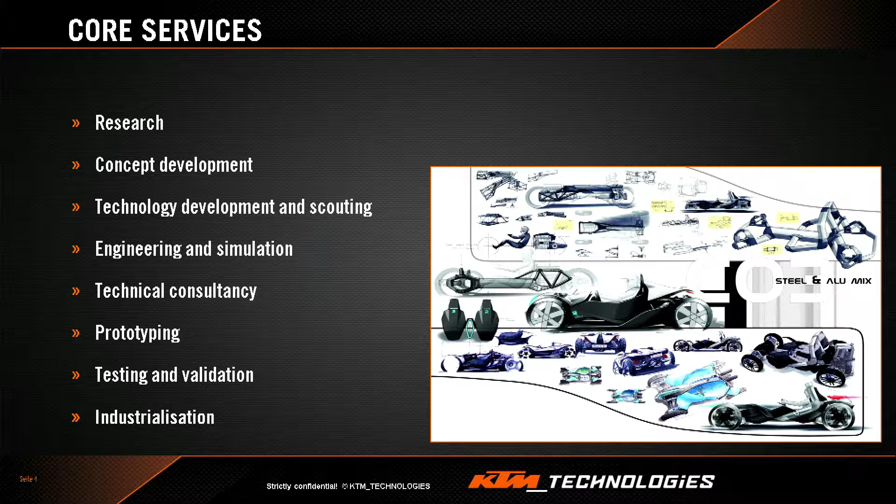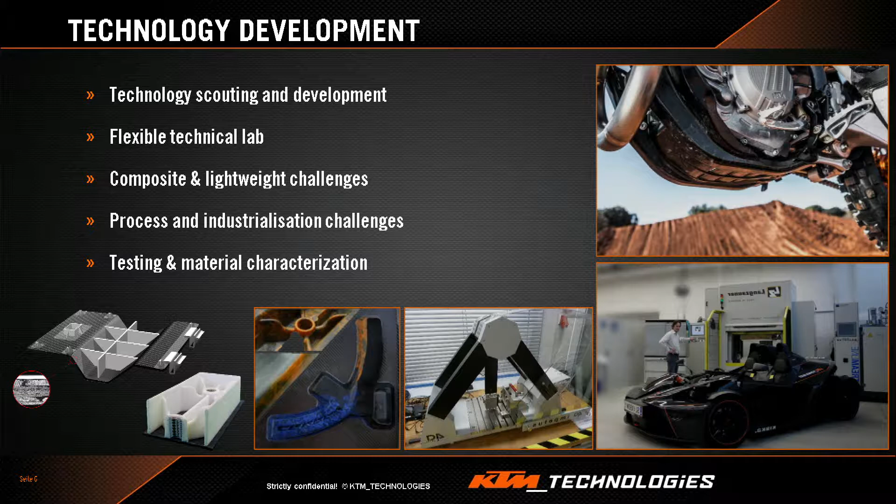We cover the whole process chain, from the early stages of research and concept development to the final industrialization of the parts. At the stage of technology development, which is actually the department I work in, we are pretty focused on facing the challenge of composites and lightweight.

We have a pretty good knowledge in material characterization and testing. Inside this department, my group, the Additive Manufacturing Group, is focused on much more than what's typically taught in this sphere, as a way to emphasize what's different with respect to the competitors.

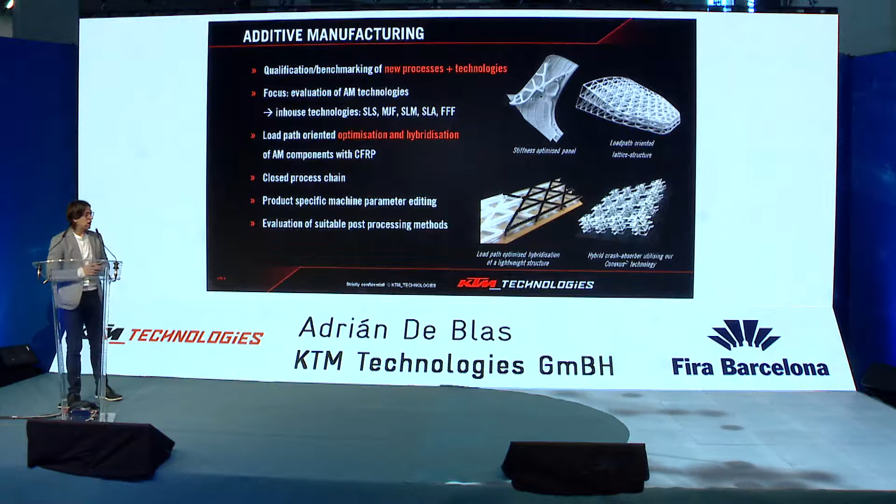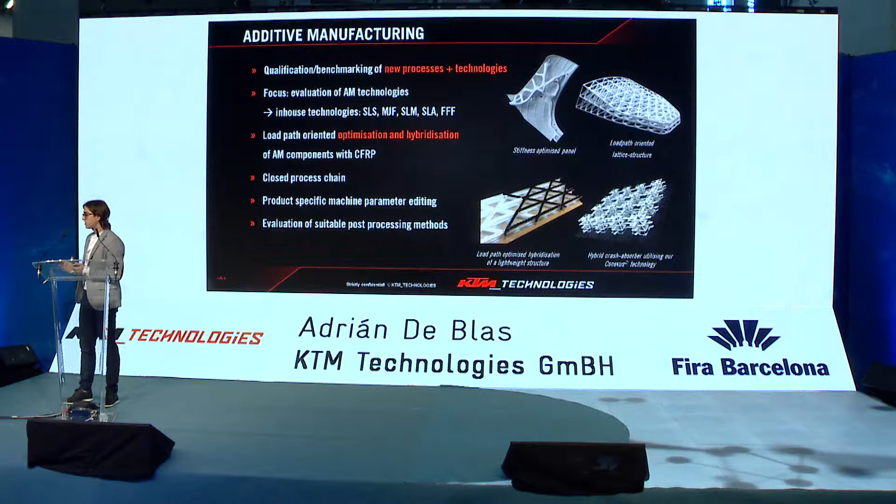We work on looking for optimized solutions for parts based on hybridization - the hybridization of additively manufactured parts together with carbon fiber reinforced plastics, and how to look for an optimized part that could bring us the solution in this case.

Regarding this, in the first stage we take a really good and deep look at new concepts in terms of materials present in the market, new technologies, and new processes.

To give you an overview of our facilities, we can use all the facilities from the KTM group. It's more than 18 different systems, 4 technologies, and in total more than 12 different materials, placed around Austria.

We are placed in Salzburg. This is our city, and we are together with Kiska, a design company that we partner with a lot in terms of design. Also at the headquarters of KTM in Mattighofen, but also the SLM technology that we use in Kapfenberg, and with the Pankl systems.

Coming back to the topic that brings us here today - when I started at the company, I was thinking about how we could introduce the use of AM polymers into industrialization. We did tests to think about what were the first factors we should take into account. For sure, quality assurance was coming, overall safety, economic viability, and process repeatability.

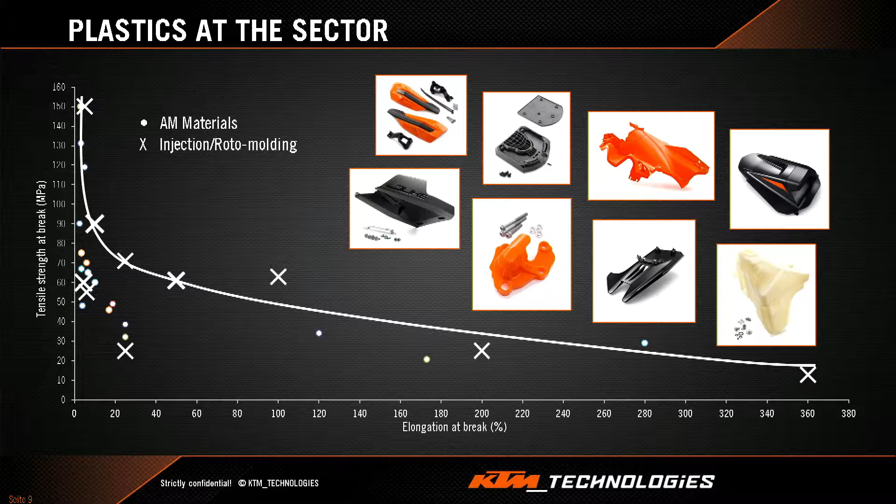We could get the benefits of using additive manufacturing, but why weren't we using it then? Well, take a look at the tendency of these material properties. Those are only two values, but we have to consider many things, like the anisotropy behavior of additive manufacturing, and different aspects like the repeatability of the parts we are getting. But just focusing on these two, we compare with the current situation for commercial available materials, and we realize there's a gap still, and we need to solve this problem.

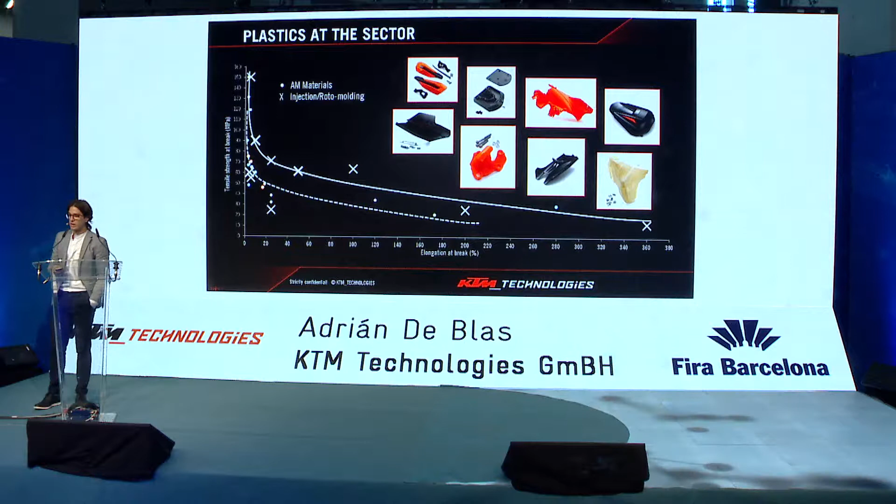So how did we think about solving this problem and bringing a solution? In our company, of course, it's a solution that has to be lightweight, but for a functional part. We thought about the word hybrid, and to achieve this far away aim, we said, okay, we need to start with two strong pillars.

The first pillar is additive manufacturing, bringing us huge advantages like freedom in design. But we have to really ensure the material performance, and that means not only getting material information from suppliers, but also characterizing this material.

The second strong pillar is the use of composites, the carbon fiber reinforced plastics, where my company is a real expert in this field. But we thought, how can we merge them? Do we need a connection? So this is the bridge, this is the hybridization. About this, KTM Technologies has developed a technology with the name of Connexus.

You can know more about this in following congresses, and also how they prepare the introduction of this into industrialization with the project Next. But we don't forget about all the pillars that are important in additive manufacturing, like simulation, the use of design for additive manufacturing, a proper way to design parts for additive manufacturing, and proper production and testing - four common pillars we really still have to think about the first ones.

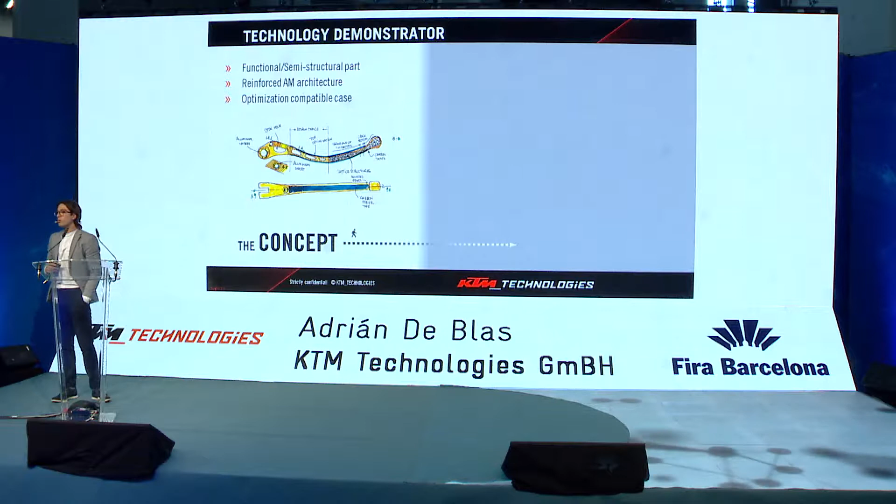And when we were told to come here, we thought, okay, how can we show these people the real benefit and potential of using hybridization? How can we tell them that this is a real way to face the challenge?

And we thought, okay, let's prepare a part that we could show them all, a part in AM polymer that could not fulfill the requirements of a load case. And then let's make a reinforcement of this part by CFRPs. And let's make this also a case where we can optimize it, to show our creativity. And that was the result.

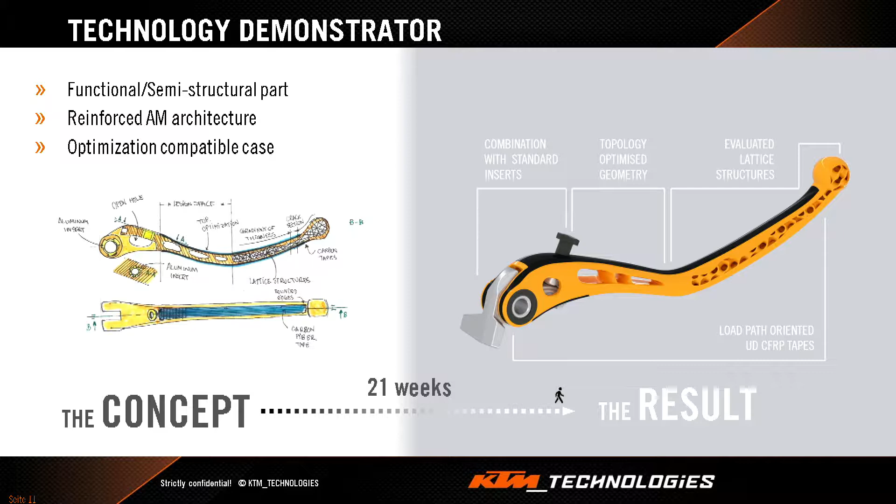After 21 weeks, we achieved this result. It's a part that mimics the same shape of a KTM motorbike brake lever for street bikes, which also includes some features for additive manufacturing, like lattice structures and topology optimization. But the brand new thing here is that we applied an optimized load path-based distribution of unidirectional carbon fiber surrounding a three-dimensional complex surface.

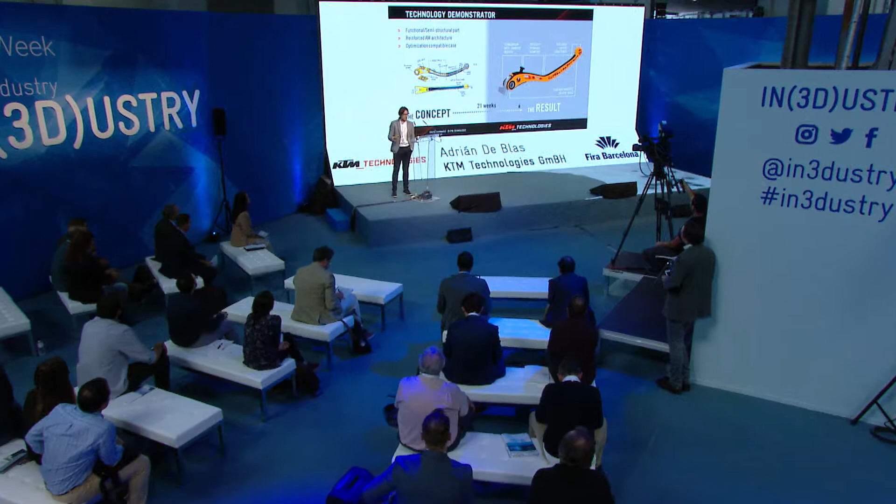So I will give you an overview of how this project was taken on in the company. It's not that easy - it's not just plug and play, using a software and defining a loading case and the constraints to get a proper final design that you can define as a functional part. Because in this case, we also had to take into account the hybridization topics.

We also have to care about aesthetic problems and, of course, the different technologies that we could use to produce it.

So when we started the project with a strong base in phase one, we started researching which existing materials we could use for this. And we defined, okay, let's make a criteria from which we will start, a starting point for the design. In this case, it was to use the ISO 8710 for motorbike brake systems, and we will withstand the load case criteria that this ISO is asking for us.

So then we defined a basic geometry based on a topology optimization for an aluminum part. This reference model was made in aluminum.

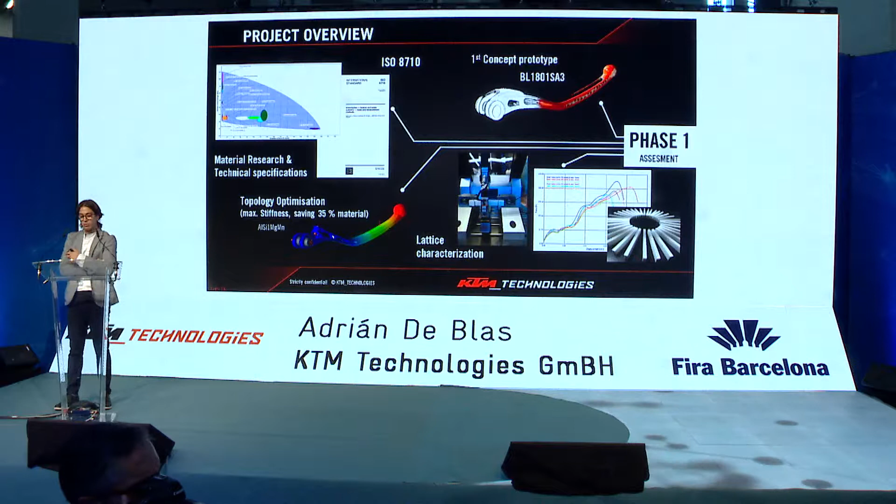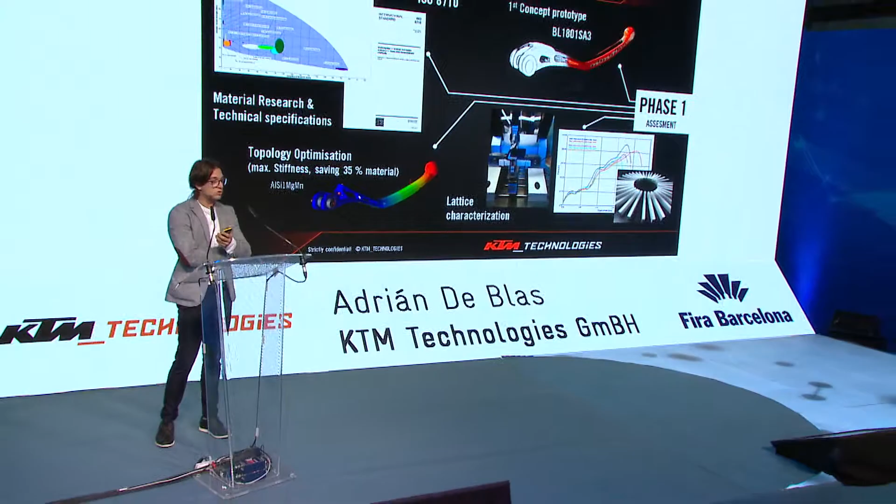And then we decided, OK, let's create a first concept and include lattice structures in this concept. But many of you fighting with this realize that the computation and modeling of lattice structures is not that easy, and it's really time-consuming for a company to achieve a final simulation. So what we did differently is to actually characterize the behavior of lattice structures. We created a library of different unit cells and made a characterization of this.

And then we base our selection of these lattice structures on the behavior, on the results from the testing. After this, we go to the proper design. Although I show phase 2 and phase 3 here, they are overlapping, in continuous iteration. The results from the simulation come to design, and come back to the simulation results to make a proper and optimized simulation.

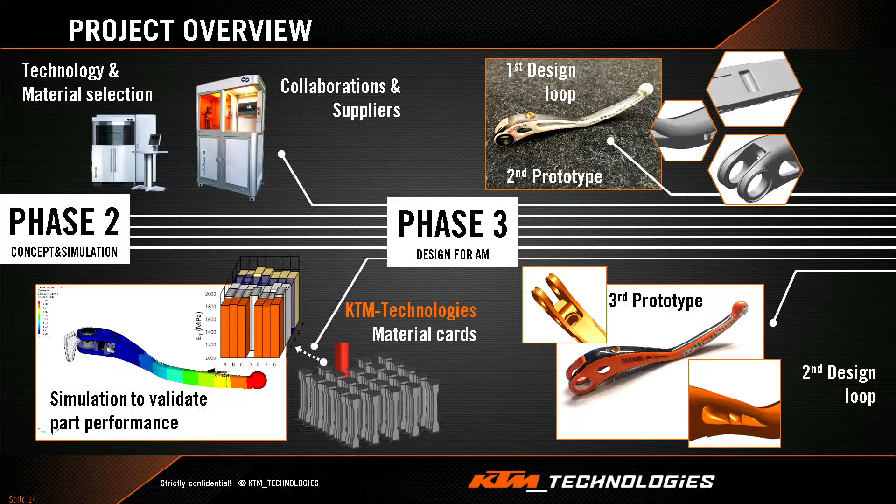In this case, what we emphasize is that we are not using the mechanical properties we receive from the suppliers, because those properties are not really evaluated in all material, all houses, all technology. So what we do is use our test specimens to properly characterize them, obtain the real properties we'll get in these parts, and use this information on the difference we can have in the same printing job. All this information goes into the loop for the simulation.

In the meanwhile, we make the networking to get collaborations, partnering, future suppliers of different technologies that could fit all requirements for this project. And as you can see, we start making the loop and iterations in design.

So at the end of this phase, we add the last design features or aspects in design, and we make a functional assembly check. We can see here in the real motorbike, OK, this part will be working and similar as it should. We already achieved an optimized simulation of a part, how it would work for this case.

After this, having already defined our criteria, we select our final design, and then go through our suppliers or partners to send them the information to finally get a part. In this case, we use 5 different materials and 4 different technologies, because we were looking to ensure which will fit perfectly in terms of the hybridization and combination of the composites together with our core part.

So that's why we went to a benchmarking project as well, to show which material will fit or benefit from this hybridization. We include in our technology, of course, a stage of surface finishing that I will let you know more about, how tough it is to actually get a proper surface finishing for a functional part.

So after this, what we achieve and what we are looking for is not only to demonstrate what we can hybridize and combine, but also we are always looking for parts that we can ride. And when this ended, the first thing we did was testing, because we validate our part. That's what I like to demonstrate, that we are not looking for maybe future groundbreaking solutions that are not yet for the current situation of the market to get into production, but we are looking for parts that we could really use in our market base, in our business case.

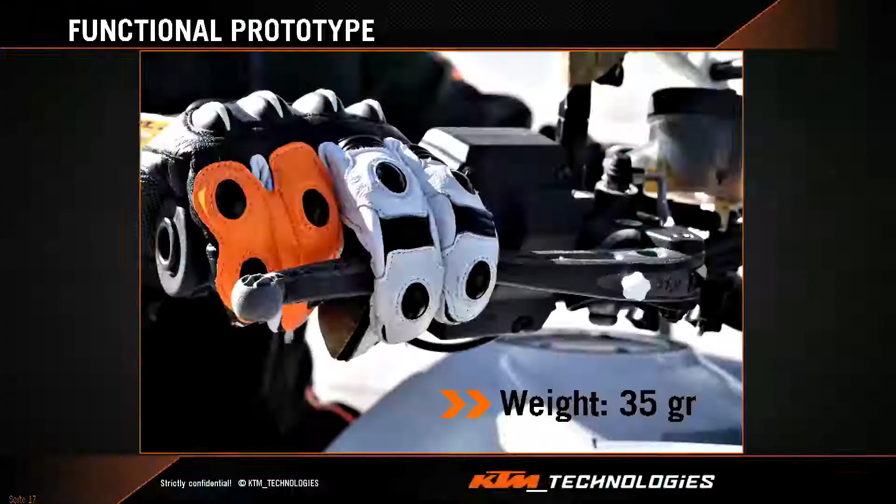So you can see here, more in slow motion, my driving test driver, how I use it. And actually, he reported to us that the feeling was proper, the same feeling as the brake lever he was using in aluminum. It was the same feeling. In this case, the brake lever was only 35 grams in the final part for this material.

As I told you, we did a benchmark, and also in this project we consider different materials, and we define what will fit us for a future project. For this part, which you can also see at our stand later if you want to pass by, we make our final report of the results that we can provide to our decision makers in the group, and we show them these interesting results.

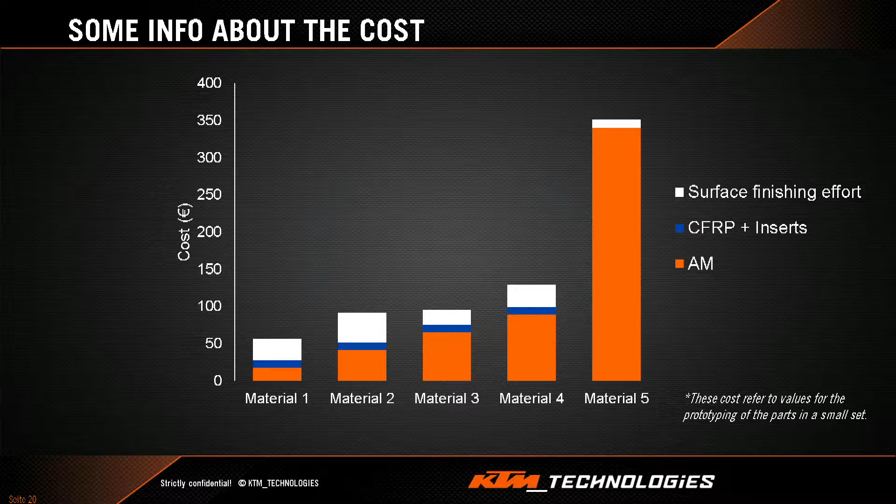For this case, in successfully achieving the criteria of this ISO, we got these parts. Materials 1 to 4 are the hybrid cases, and material 5 is the aluminum case that we replicate also in SLM. In this report, what we can see is that it's pretty important to make a proper surface finishing of the part and obtain a functional real part. We have to spend different efforts depending on which material and which technology we are using, and in this report you can see these complex differences.

When we have the solution from material 1 to 4, you can see, okay, material 1 is the cheapest one - why couldn't we use it? It's not only about cost, of course, in a business case. Depending on which organization or what's the aim of the project in additive manufacturing, you have to properly analyze.

So this is a summary of our analysis that we report to the stakeholders. Depending on our aim to satisfy the application - if it was lightweighting, or if it was to have a real accurate part, or to really achieve the best hybridization possible - we have to look into different solutions depending on the material and, of course, the technology.

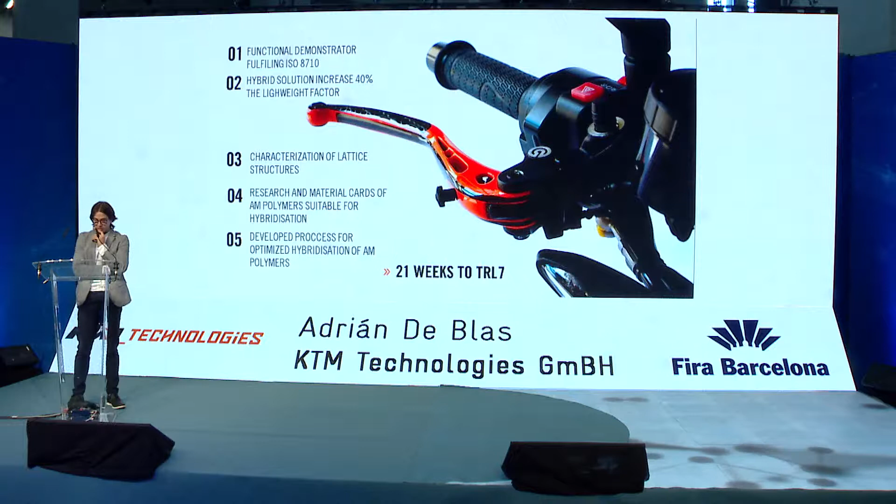So to give you a final overview of this project, and with these ideas, you can also get your own conclusions about the best potential of this hybridization concept. We finally got a technology demonstrator with the shape of a brake lever, and this hybrid solution presents a 40% increase in the lightweight factor compared to the aluminum one, if we focus on achieving the criteria of the ISO.

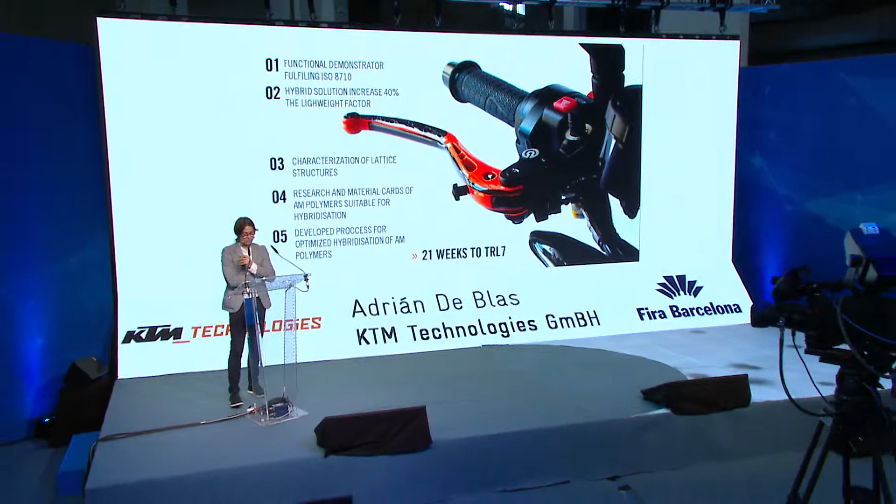Another interesting point is that just by making this project, we successfully characterized different lattice unit cells that we could use for other projects. That's pretty important, given the current state of the art in the computing of lattices.

Fourth point - we did good research in materials, but we also created our own material cards. That means we really characterized the materials for polymers in different technologies with our own in-house testing methods, so we properly ensure that next time we're prototyping, it will achieve the mechanical properties we got in this testing.

And for the last one, we are currently developing the technology of hybridization further, but this project was a huge step forward to successfully achieve great chemical bonding and hybridization of the materials, looking forward to a functional real part into the market.

To sum everything up, this project was done in 21 weeks. So it's a good example of the benefits of additive manufacturing, and how fast a project can go.